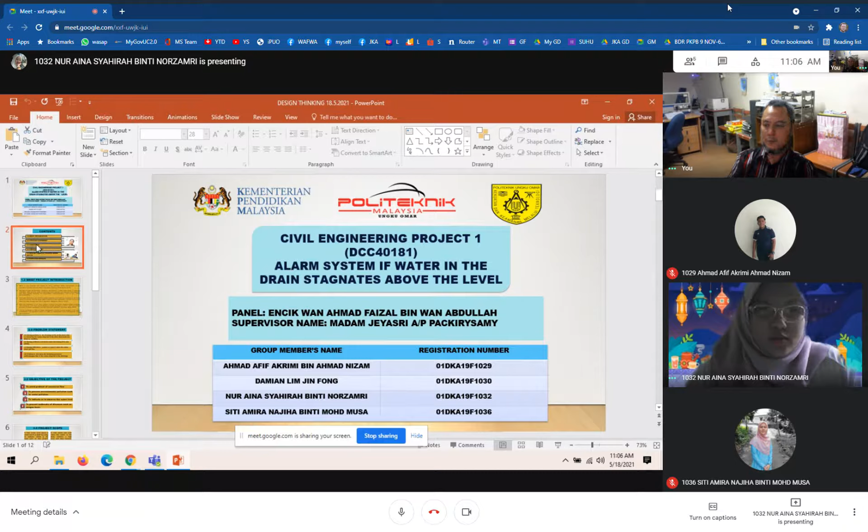So, content dia: 1.0 brief introduction, yang kedua problem statement, yang ketiga objektif, yang keempat project scope, yang kelima design thinking process based on FYP, yang keenam expected result.

Yang pertama, introduction. Water is very valuable and needed for many activities. Water conservation is also important and has adverse effect otherwise. Yang kedua, storage of water for domestic, industrial, agricultural or other such need is especially important. Safe drinking water is becoming more polluted and injurious due to population and their greedy demands for urbanization, industrialization and so on.

So yang kedua ni dia cakap penyimpanan air secara domestik, pertanian sangat penting. Air minuman jadi tercemar dan memudaratkan penduduk.

Yang ketiga, the water level alarm has... In case if you want to know, during the presentation, if you are reading from PowerPoint, after that, don't translate in BM. Just carry on. Okay? Okay, good, carry on.

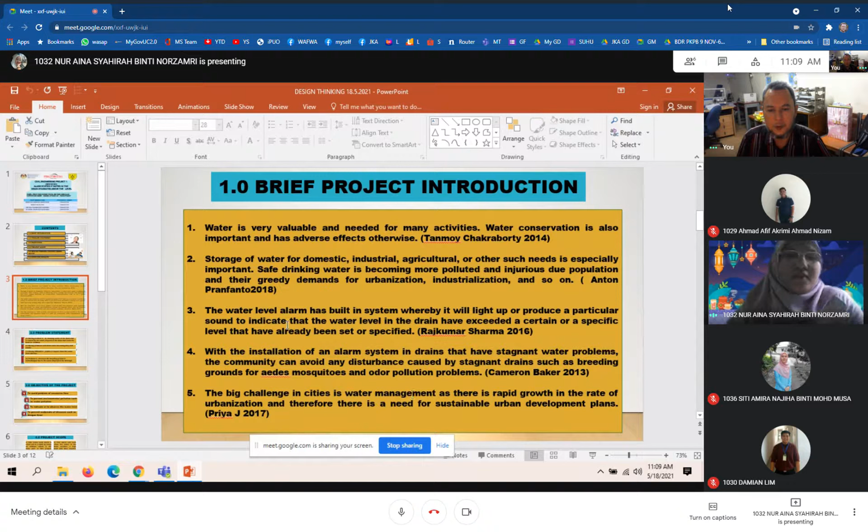So yang kedua, problem statement. Yang pertama, having problem to do cleaning works at the drain that is caused by waste disposal in the drain that leads the drain to overflow. Yang kedua, having problems with drain water becoming dirty and smelly. Yang ketiga, having difficulty to predict or expect when the water level will rise. Yang keempat, problem to decrease the breeding ground of aedes due to the waste disposal in the drainage.

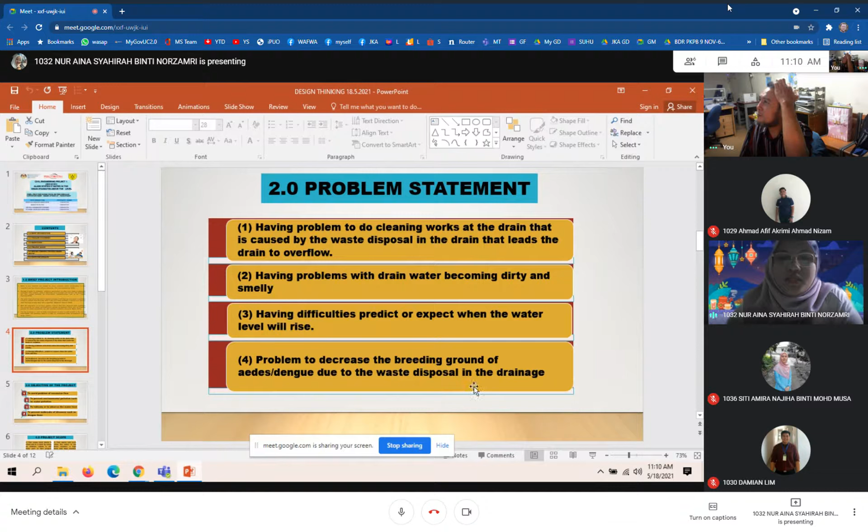Yang ketiga, objective of the project. Yang pertama, to avoid problem of excessive flow. Yang kedua, to prevent environmental pollution such as water pollution. Yang ketiga, to indicate or observe the water level. Yang keempat, to prevent outbreak of disease such as dengue fever.

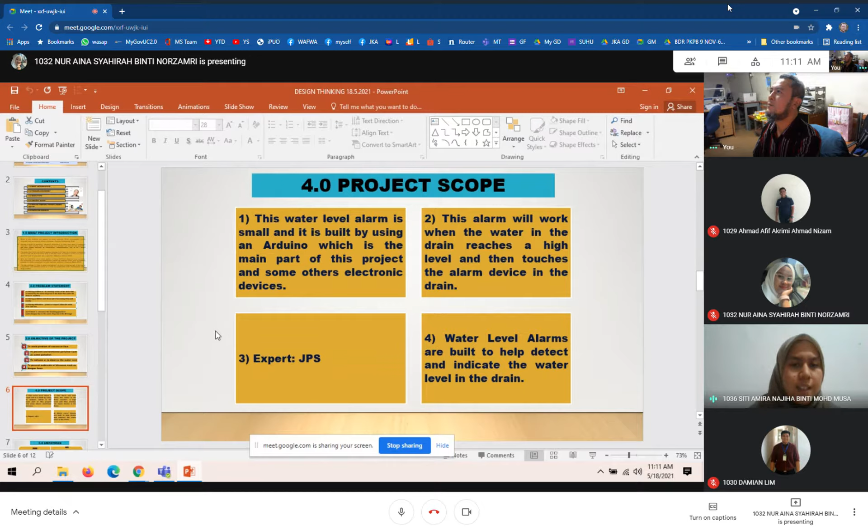Next, empathize. Here, one: residents become concerned with clogged drains causing flooding. Two: an increase in cases of Aedes mosquito becomes a concern when there is stagnant water in the drain.

Next, see. One: drain water overflows out of the drain, especially during the raining season. Two: drain water causes the breeding ground of Aedes mosquito. Three: drain water becomes dirty and smelly when the drain water exceeds the drain level. Think: most people often throw rubbish down the drain and cause the drain water level to rise.

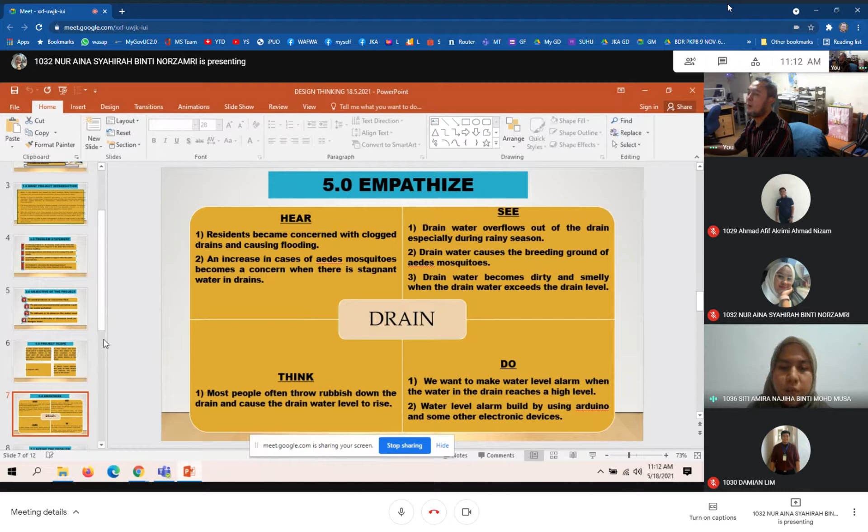Do we want to make a water level alarm when the water in the drain reaches a high level. The water level alarm will be built by using Arduino and some other electronic devices. And the next,

Define the problem. Water is a very important resource in human life. Almost every activity performed requires water. Therefore, water is an important basic need.

Caring for the environment must be given priority in line with technological modernity. There is much news on television about environmental pollution, especially water pollution, with a lot of dirty and toxic waste dumped into the river. Therefore, cleaning work must be done starting with the river.

However, river cleaning alone will not solve the problem of river pollution because there are still many dirty drains. Drain water flows into the river and is used by humans. One cause of the river becoming dirty is garbage dumped into the drain, which results in clogged drains that restrict water flow into the river, especially during the rainy season, causing water to rise and enter the surrounding area of the house.

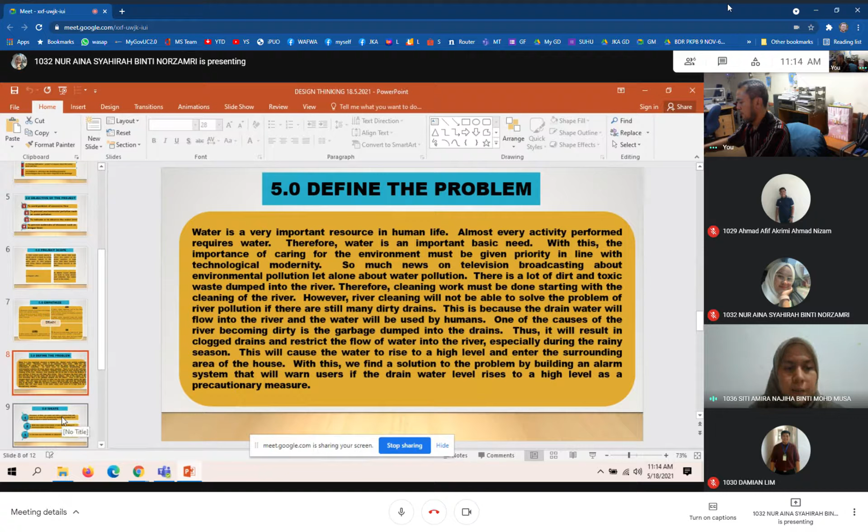Thank you, Amira. Now we're going to continue with the next design thinking stage, that is ideate. Because of the problem stated by Amira, we came up with a solution to help solve this problem by building a product, and that product is a water level alarm. With this water level alarm, it will avoid the problem of excessive flow in the drain, and it can also be used to indicate or observe the water level.

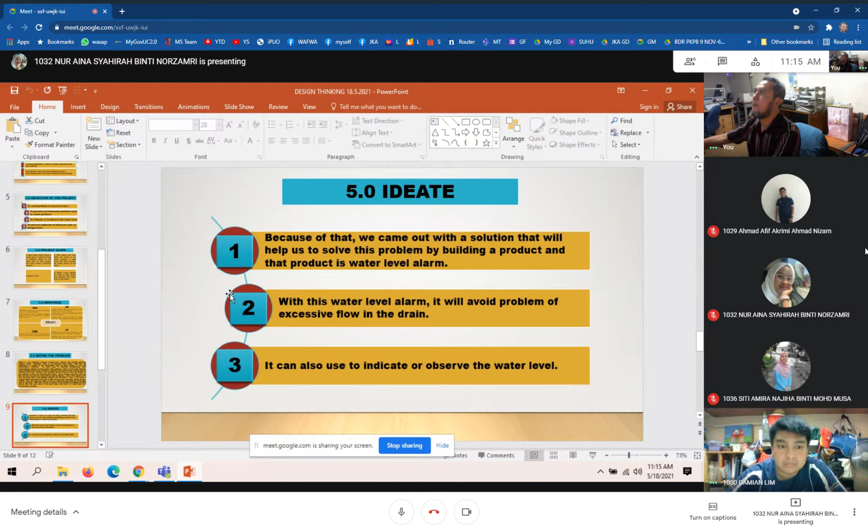So what are the things used to build this prototype? The first is an Arduino; we use a ULN2003 integrated circuit and one buzzer. The next thing is 5 sensing wires. The fourth material is a 9-volt battery, and the last is three light emitting diodes, also known as LEDs. Now I will pass this slide to Afif Akrimi.

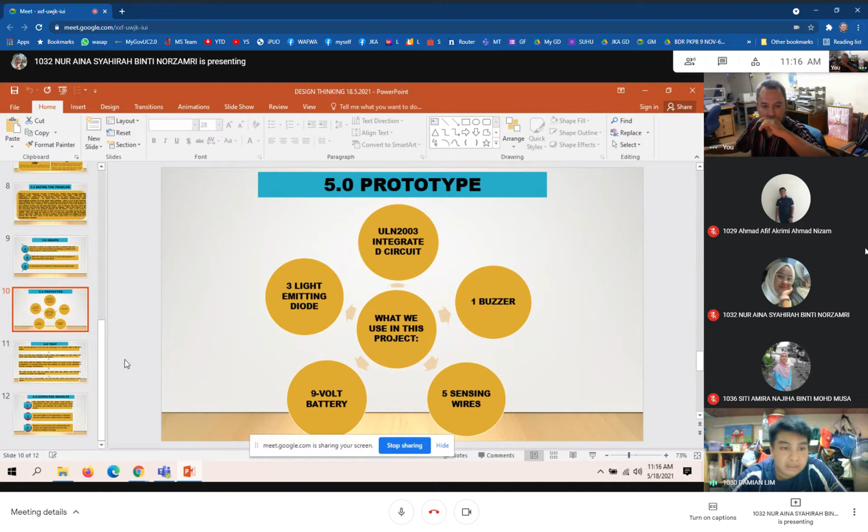That's all for me. Okay, thank you Damian. Now I'll continue with the sixth slide, which is test. Before producing a product, we must ensure that the product works well and is safe to use.

First, we are going to test run our prototype in a bucket filled with water. Then we will see whether the alarm will trigger or not when the water level surpasses the alarm threshold. If the alarm did not trigger, that means there are some errors during testing.

If it functions properly as expected, we will then test the water level alarm in the drain itself. Next slide.